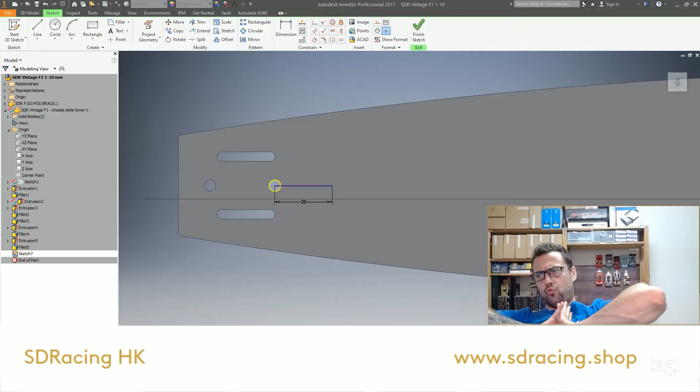Okay, alright, I am back with my chassis design. What have I done? I've just basically extruded the shape of the chassis, let me show you. I've changed it a little bit at the back over there.

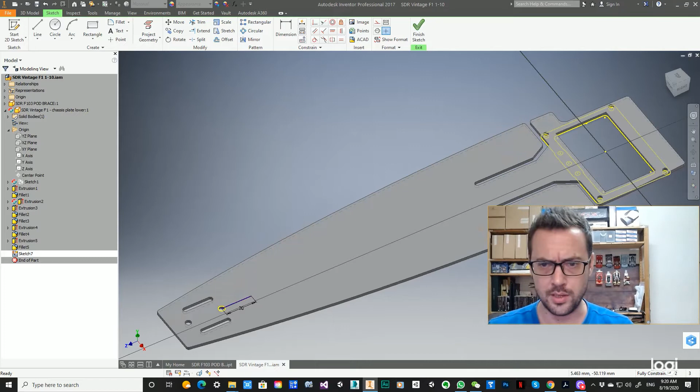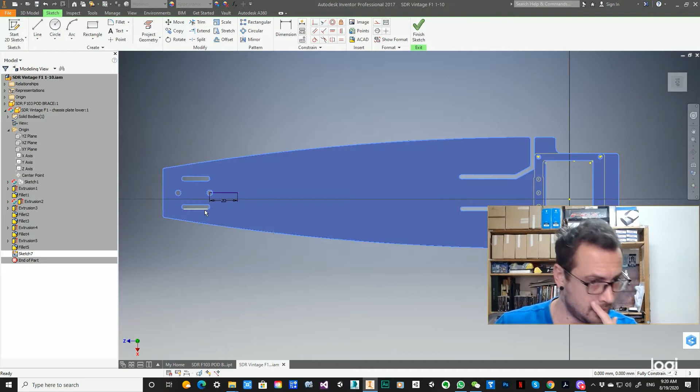I just wanted the pod to be as wide as the rest of the chassis. You can see I have now the curve following all the way to the back from the front, and here I need the opening for the gear, the spur gear from the diff. In the front, all I've added was these little slots where the front ends will fit and stop moving from left to right.

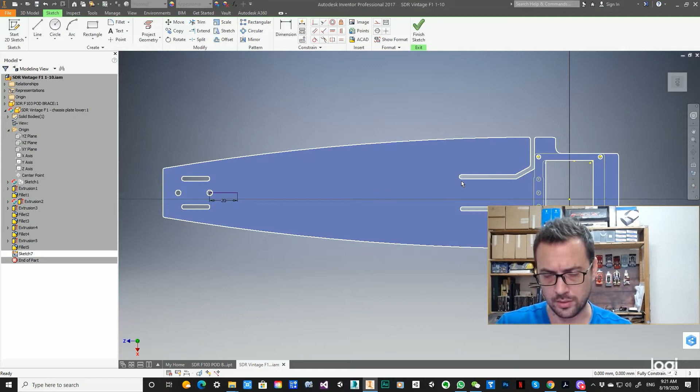The other thing I've changed here, these slots, the relief cuts, were 30 mil originally, and just looking at the overall length of the chassis, I've made it 40 mil, so there would be a lot more flex over there.

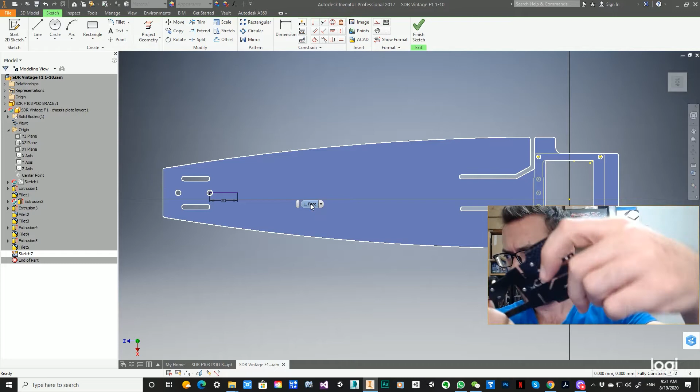And then inside I'm going to do flex cuts as well, the same way I've done on the trike, the mini version. You can see the mini version, I have the flex cut for the T-plates over there, and then more relief cuts, so that allows a lot more flex overall on the chassis.

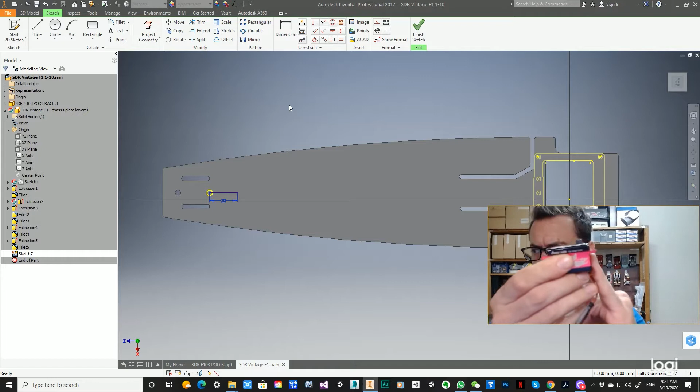So once I have everything placed around battery, servo, and so on, I will work on that. For the front, you can see this little 20 mil marker I've had. This is where the front wall of the servo will be. So I'm going to have to figure out servo mounts over there.

I don't know if I'll make the servo mount along with the front brace or not, because I would rather have one piece that I can use for both the F1 and the vintage F1. So I'll see about that, but I'm just going to place the servo - by the way, your best friend on earth, digital caliper. So the servo is 41 by 20 mil.

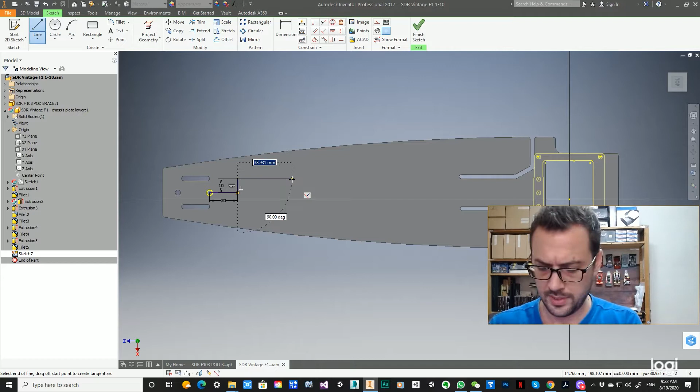So let's go place it. And here you go. So this is where the servo is going to be. And now I need to figure out, first of all, before I think about how I'm going to place the battery.

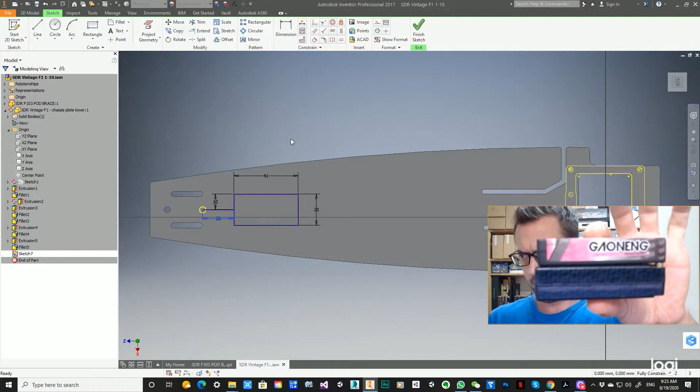Ideally, I would like to be able to use regular hard sticks, shorty sticks, as well as low center of gravity shorty sticks. Those are the same dimensions, except that the LCG is just a little bit thinner. So ideally I want to run those cars with the LCG, but I don't know if the long battery is going to fit on it in length.

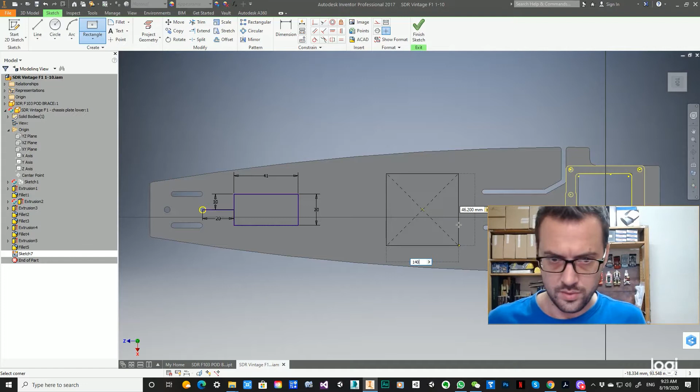But I would like - best case scenario would be to have everything fit. For the long battery, I need 140 by 45. Let's see exactly how wide this is. 46.2 - okay, 46.2, 140. Let's make one of those square anywhere. So we get 46.2 and 140, we can place a long battery pack.

Now the issue that's going to be with a long battery pack is that we're going to have to put the electronics on an upper level. But there is a lot of space in the chassis, and there's going to be an upper plate anyway.

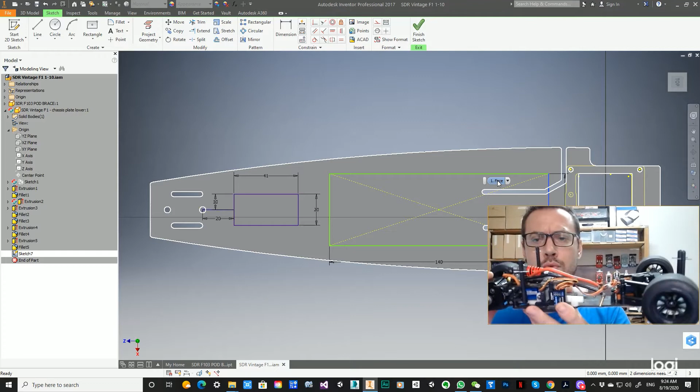The question is, how do I want to remove the battery pack from the car? Let me show you - on cars like the TRF 102, you have the upper carbon deck, and the battery slides underneath. You need to remove 2 screws every time you want to remove the battery. This on its own I find troublesome, but it's only 2 screws.

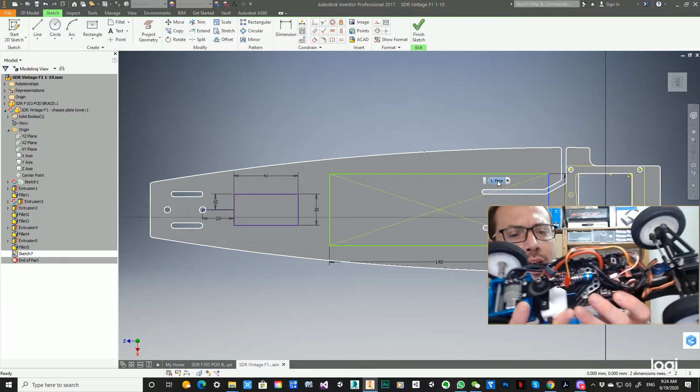On the conversion that I've done for the F103 GT, I need to remove 1, 2, 3, 4 screws to remove the battery and then slide it underneath. This is too much. So ideally, I would like to have something that I can remove from the side, a slot or something. I gotta figure it out.

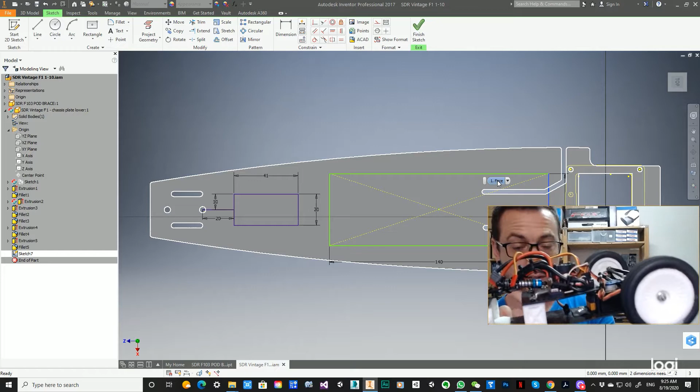Oh, one thing I need to design - you see, the battery here is mounted on this tray, but this tray's function is to hold the T-plates over there. So the battery is about 5 mil from the T-plates.

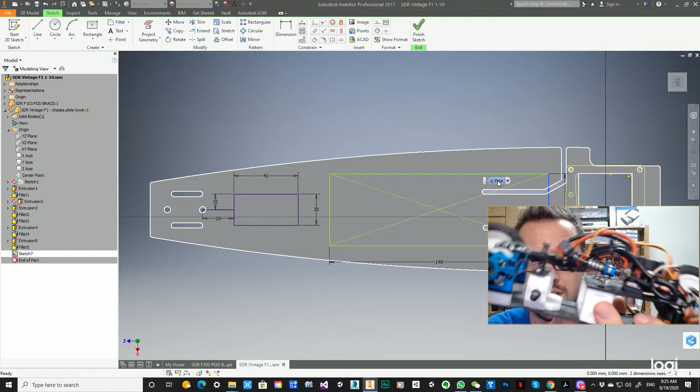Now, with the system that I'm going for, when the T-plate is part of the chassis, I need to allow movement of the T-plate that will not push the battery around. And for traction, I want to have the battery as far back as possible.

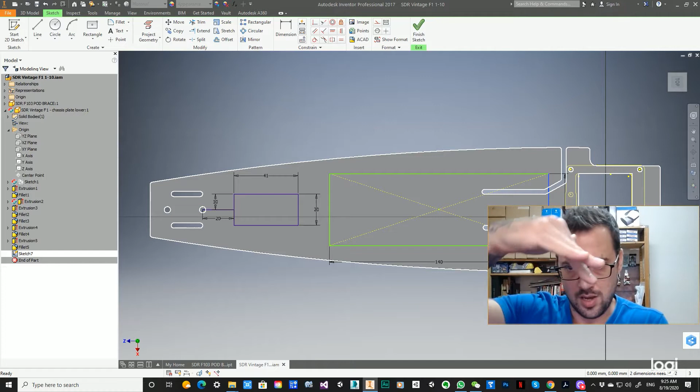So at the back of the chassis here, all this is going to flex left to right and up and down. So I need to give room for that to move. I'm going to have to build some kind of part to hold this at heights.

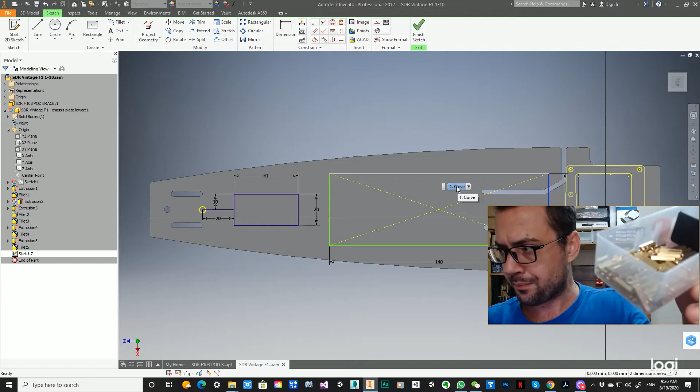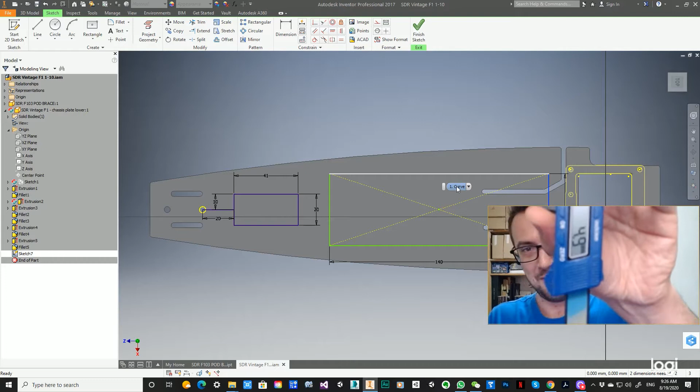Now I have a lot of different poles, different sizes that I'm going to use for the construction. So I think I'm going to have a first deck that is going to be... so this is 4.8, so I guess this is supposed to be 5. Am I at 0? Yeah. Okay, so that's what happens when you buy manufactured 5mm poles, they're 4.9 or 4.8. Let's see if they're all random like that. Yeah, okay, so those are 4.8, 4.5. I could use nylons, I have nylon ones. Those ones are brass, I think the brass are going to be fine.

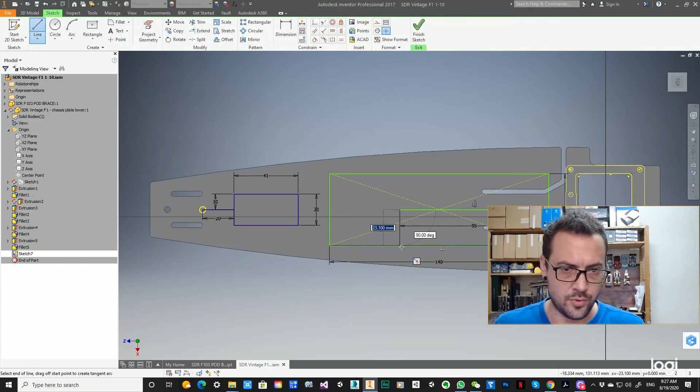So I think I'm going to work out a deck on which I'm going to put the battery on top. Let's see what's the dimension for the shorty. The shorties are 95, same for the LCG, 92. So okay, let's say 95, just to have an average. About this distance from the back, that seems about fine. Okay, so the shorty is going to stop around here. That's my shorty pack and my LCG pack.

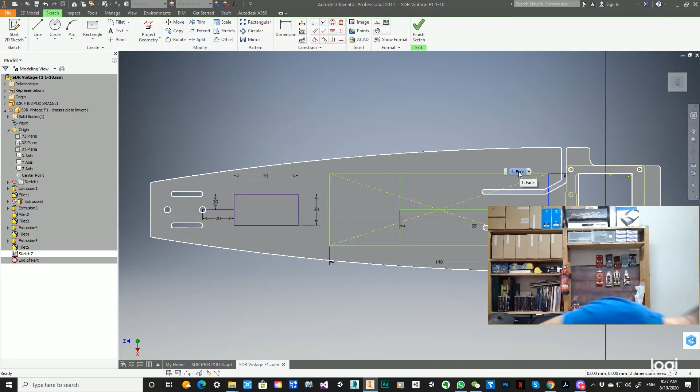So ideally, with the shorty and the LCG, this is where you're going to place your electronics, your receiver and your ESC. You actually even have space to put them on the side here, all the way up. I mean, on the side - you see this is where I placed mine, over here. I placed mine at the back. Traditionally, people will put it in the front to have more weight at the back, which means more traction, but that is just suited for my own taste.

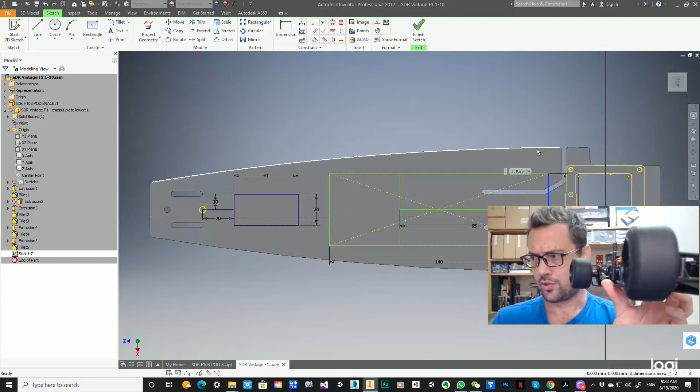But the receiver, can you see? Yeah, the receiver is mounted like that on the side. So on this narrow area, you actually have enough space to place a receiver or an ESC, just place them up. So I think I don't need anything specific for using the long battery, as the receiver will have space on the sides. And all I need to think about is to have a deck to hold those - but actually that might be a really good way to have the battery held simply by a couple of straps.

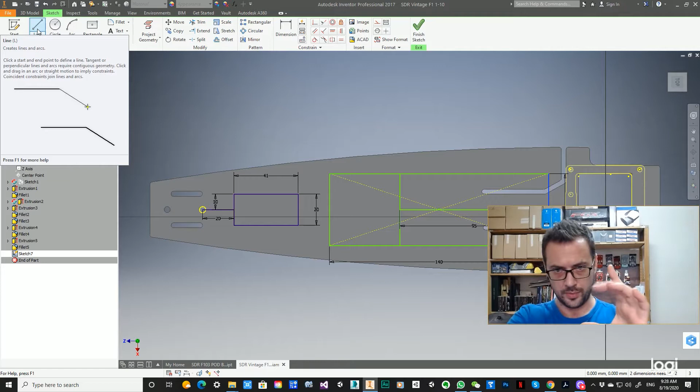Okay, so let's work on that. I think I have an idea what I'm going to do. So we are going to have those poles, those are diameter 4.5, so let's say 5 to be safe. And I think I can design a frame that can hold everything into place, so the battery can be put on from the top and held with a strap around. This way I don't need to actually figure out an upper deck. So that might be the best solution, because then all my dampening can be done with taller tubes.

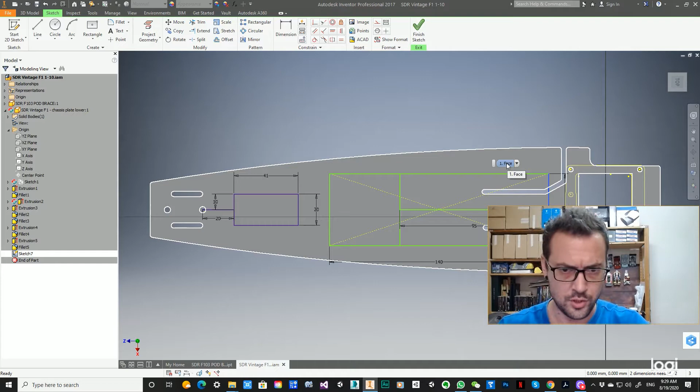So if you try to see - let me show you a quick drawing so you can see what I'm talking about, so it's less abstract. Okay, let's open Photoshop. Let's plug the Wacom tablet, and let's give you a quick look at what's going on in my head. All right, so I'm using my Wacom A4 tablet now to draw. You're going to see my double screen, so I'm going to reduce this to a single screen.

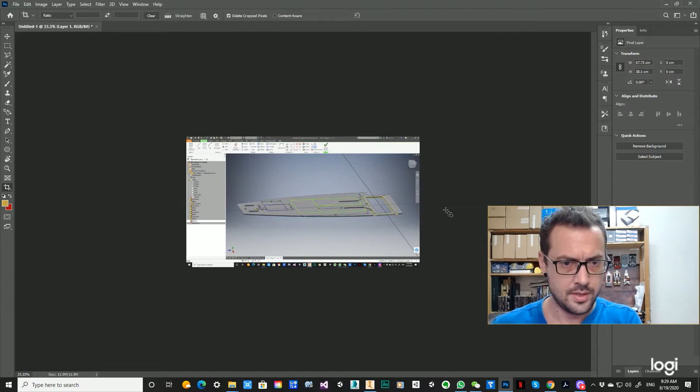So what I'm talking about is I have those little poles, how big am I right now? Okay, first of all, let's change the color. So I have the first little poles that are just 5mm tall, those are going to be over here. Little pole, 5mm. So I'm probably going to have somewhere in the neighborhood of 3 on each side - over there, another one over there, and another one over there.

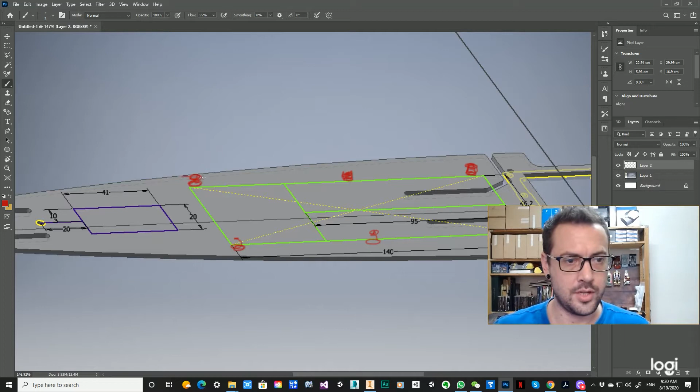And so those are going to accommodate some kind of plate that is going to have probably anchor points for the different size batteries. So I'm going to have to figure out maybe one way will have the full size battery like that to hold the long batteries, and then the other side will have the hook for the shorty batteries, so it will be reversible - you can use it one way for the regular size stick, the other way for the shorty size stick, and you can actually reverse.

If I make it symmetrical, you could reverse it to move the battery from the back to the front. So that FRP is 2 mm thick. This pole here is 5 mm. Then we're going to have these FRP parts that are going to be 2 mm on top of it. And then on top of that, I can have longer poles from any dimensions.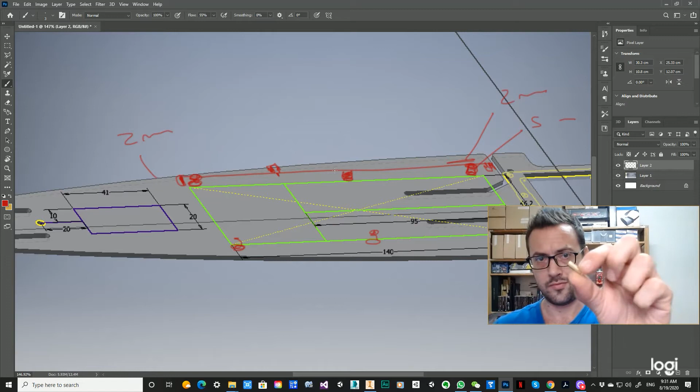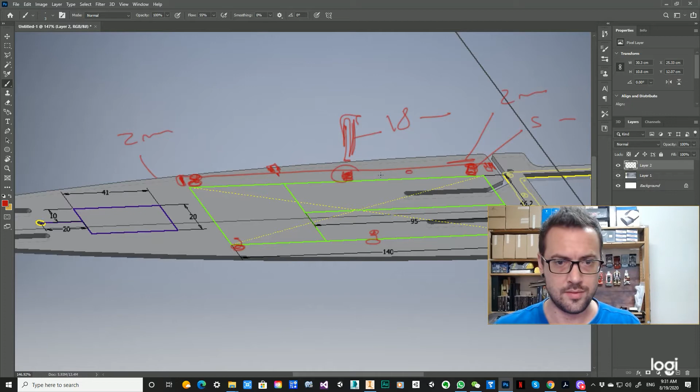This should be 20 or 15. That's an 18. I think I have a couple longer, I'm not sure, but this is easy to source. Yeah, 18 I think is the general size that I have. So on top of that, you can have an 18 mm pole, which doesn't have to be together here. You can have separate holes to mount it in different places, because I'm going to need to figure out at the rear here, we're going to have the pod assembly over there.

And on top of that, we're going to have the plates that you see in yellow right now. And on here, we're going to mount the 2 dampers over there. So this dimension is going to be fixed with the dampers that I'm going to use.

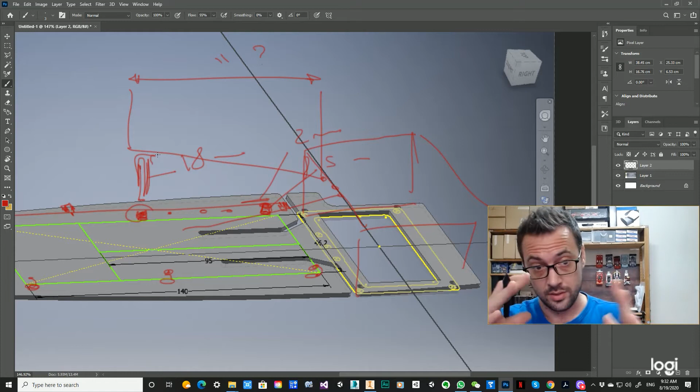So this, I'm going to have to figure out the dimension, and I'm going to have to work out where the 18 mm pole is going to be. And it might be 18, it might be more or less. I think that would be good as well, because the angle that you give the damper changes the dampening dynamic. So this is what I'm going to have to work on first.

I'm going to have to figure out this first mounting holes, trying to have something regular, and figure out this long FRP bar. And I believe that I can have this FRP here, I would have another similar one over here, like so. And then in order to mount the servo, I can have something similar using maybe the 10 mil pole or something like that.

And then I can have an FRP part, so that I can see my mouse. I can have an FRP part that holds this into place around that. And the servo comes to screw inside here. So that would give me options as well to have maybe more stiffening later on, but that would be 1, 2, 3, 4 FRP plates for the entire 5 with the back over there.

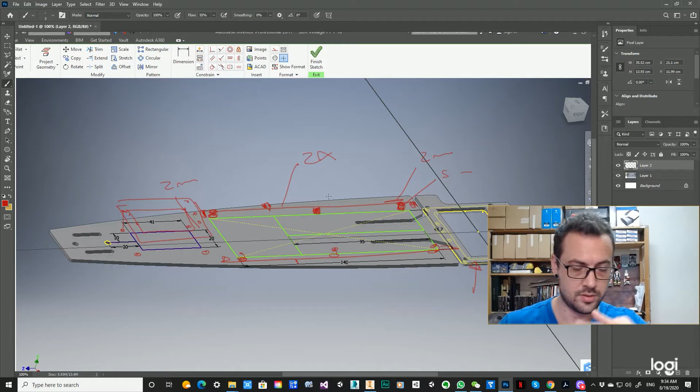So 5 FRP plates, knowing that those are twice the same. They just mirror of each other, but they should be the same if I design it properly. So this would be good, because I can get away with 5-piece FRP only for the entire chassis, and then everything else is brass or aluminum poles.

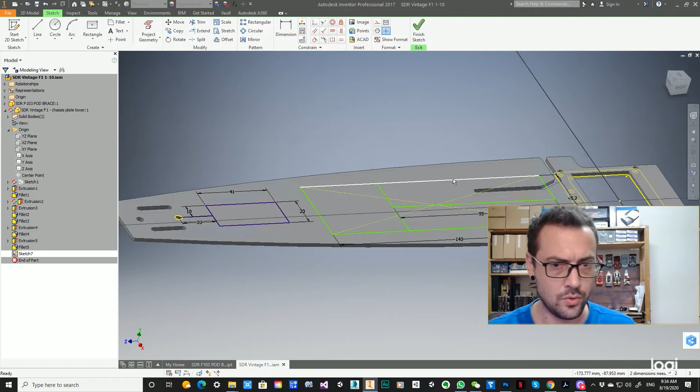Okay, so I got my game plan. I'm happy with that. So now I got to figure out how do I do these bars. Let's see. I'm going to keep this sketch of the batteries as is, because this is a good reference to work from, and the servo is on it as well, so that's perfect.

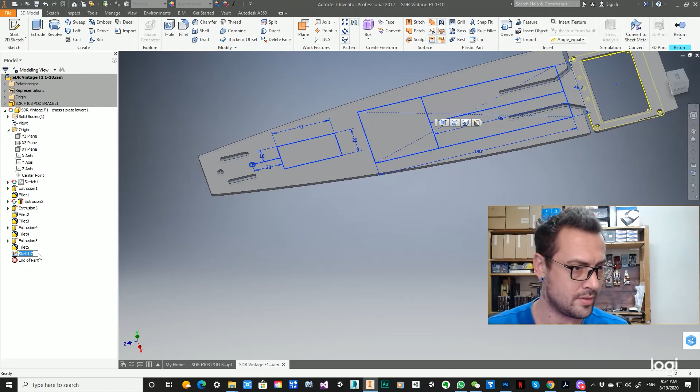So I'm going to keep these for reference, and I'm going to make a new sketch on top of that, and this is going to be placing the FRP that I want to have. So let's sketch the large battery first. How big do we need this to be?

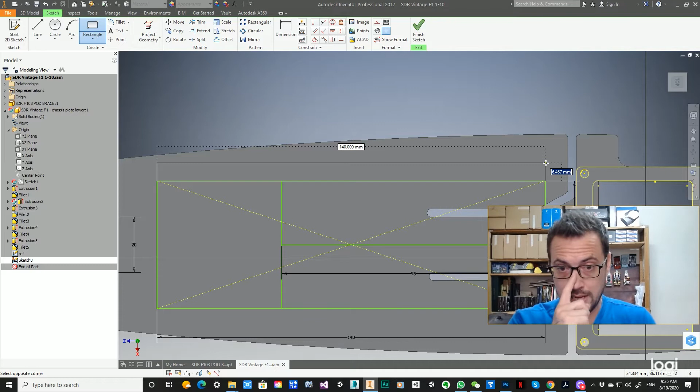6. I want stiffness, so that's another thing that I can do as well, is depending on how many poles I'm going to put along the chassis, I can add or remove stiffness by the amount of mounting points that I have. So I think I'm going to do as many different mounting points as possible. So I want something that's quite thick. I don't want something too thin. So 8 mil should be pretty sweet.

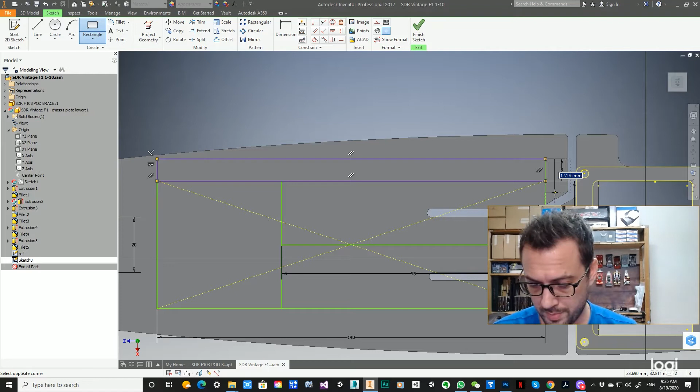On that front to hold the battery, I don't need too much. 3 should be enough, 3 mil should be plenty enough to hold the battery in place. So 13 by 3. And then for the shorty pack, it's going to stop over there. So here is what I was talking about. I'm going to give it 3 by 3 as well, and this is going to be what holds the shorty pack in place.

And so this shape that I just drew over there is something that is going to be usable in both directions. Let me remove everything so you just see this on its own.

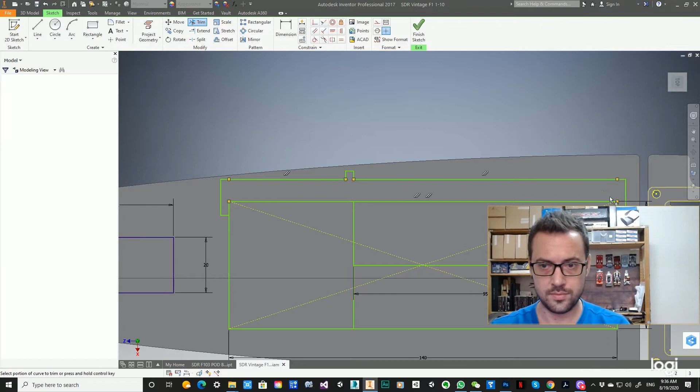We can remove this one. So...

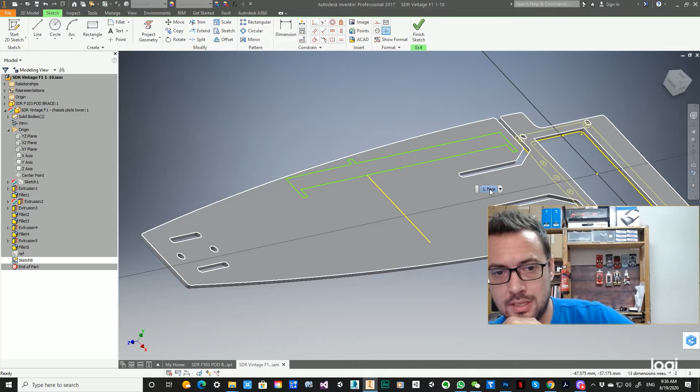That will be the FRP plates on top, and I can have probably in the neighborhood of 8 holes equally distant over there, and then I can mount as many or as little mounts as I want to make the chassis more or less stiff. I think this is a very good tuning option for the chassis. Yeah, so let's do that.

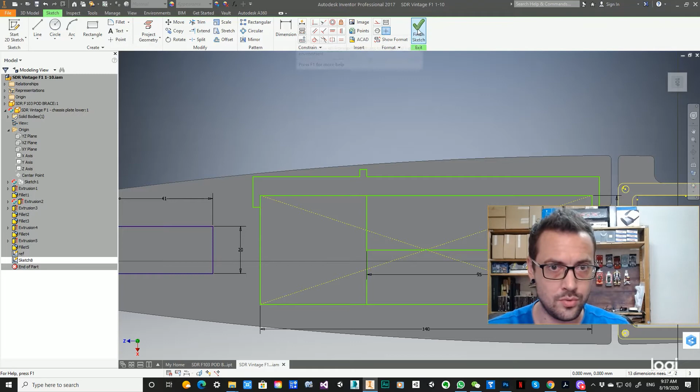Let's bring back the battery. This is just for reference what I'm doing. The FRP will be a new part of the assembly of my 3D file. At the moment I'm keeping this as a reference point, so I'm going to do, once again, keeping this as the FRP reference. So this is going to be my ref.

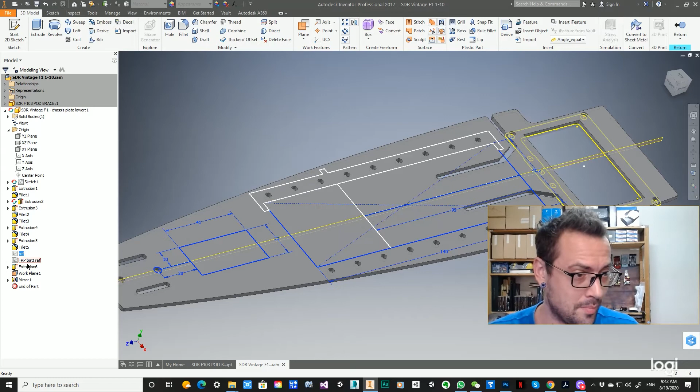So let's bring back the drawing that I had before. I had done the FRP reference plates that will be holding the different battery sizes, and so I made mounting holes equidistant, both in width and in length, with the battery mounts. The reason why I decided to do that many is that I can select how many to use when I mount my battery, and this way you can stiffen or loosen the flex of the chassis by how many you mount between the lower plates and the upper plates. So this is a really big plus, I think.

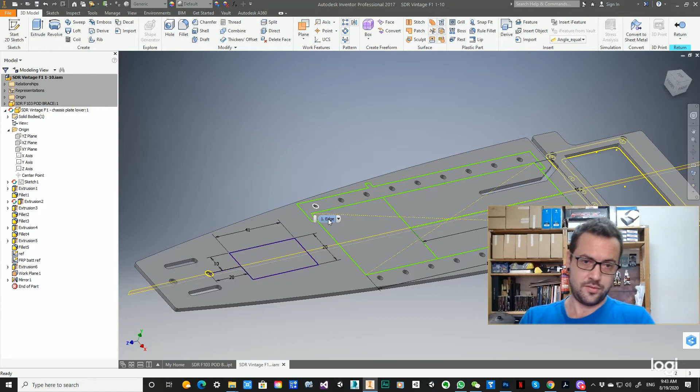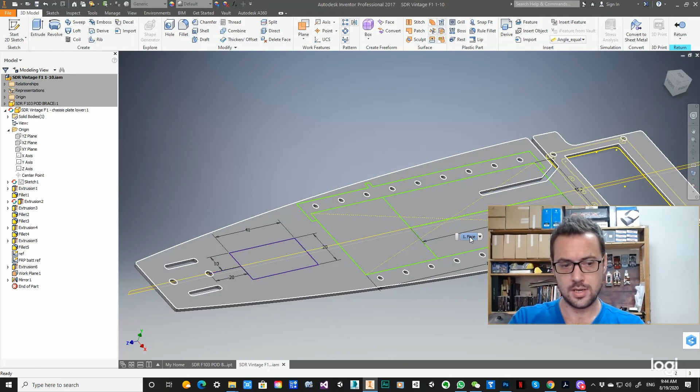I don't think I'm going to use 5 mil. Oh no, I am going to. I just realized a big mistake I made that I didn't think about. My original intention was to raise the battery 5 mil in order to give the plate over here, the T plate, enough room to bend up and down and left and right. Right now I'm designing those plates as if they were going to be stuck directly on the chassis, but they are not going to be. I need the battery to be raised a little bit. In order to do that, I just need anything underneath that is going to raise it and allow for a Velcro strap or elastic strap or tape to be put around.

So this is where I'm going to use those 5 mil. I need something that is going to be balanced and that is going to mount underneath here. So time for a new sketch.

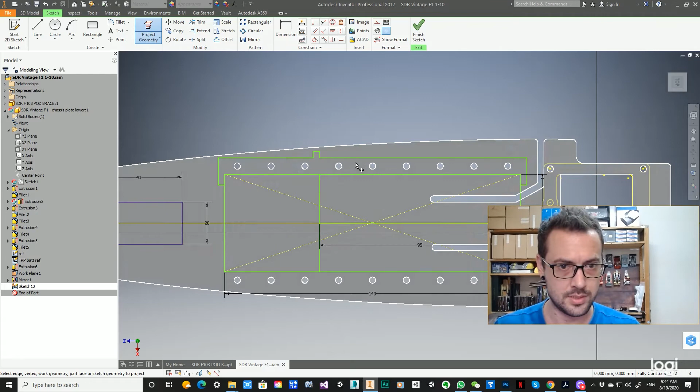So I want to mount the battery. I'm going to have a plate down there that is not disturbing the flex of the chassis too much. Actually, I can do what I did on top here and have more options to mount these plates. The thing that's going to be tough if I do height adjusters like that...

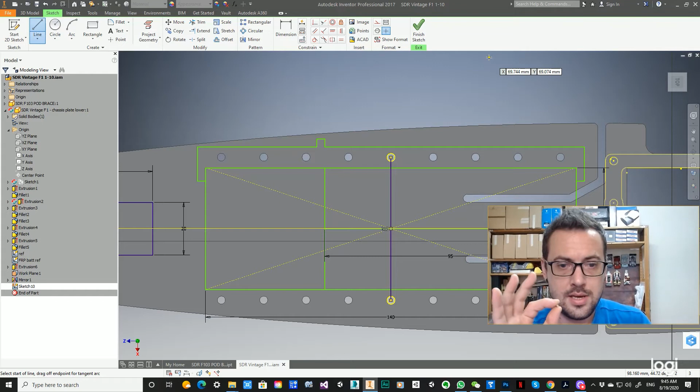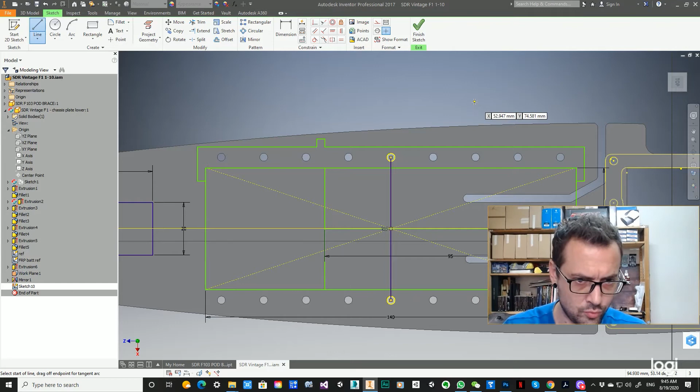You see they're very, very small, just 5 mil, which means between the lower screw and the upper screw I'm going to have a very small window to mount them. But I think if I find the right size screws, that is going to be feasible. I'm just going to have to work it out. I think the screws are going to have to be very, very short.

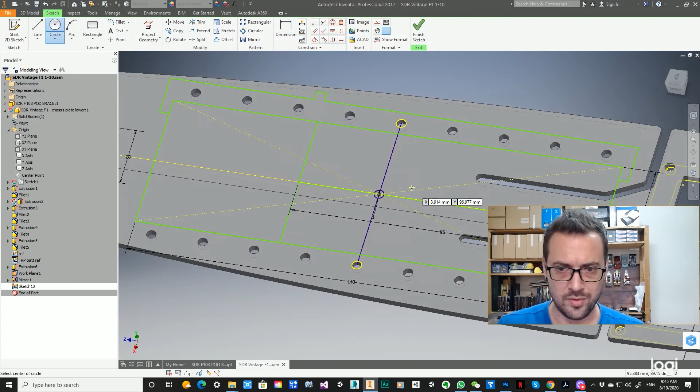But I think that's not a problem, so we're going to mount it from the bottom. I think this is the best way. I want to have parts that are as small as possible because I want to be able to make as many of everything in one big sheet of FRP from the factory. So that's another thing I'm considering, that everything is going to have to be countersunk.

For the chassis to be completely flat at the bottom. Yeah, it is. Sometimes I'm thinking I shouldn't countersink, just for lowering the cost, but I think this is just nuts.

I'm not going to be able to get away without doing the countersink. So for my screws, I'm going to have to make the mount. I think this is fair enough if I do something between those holes.

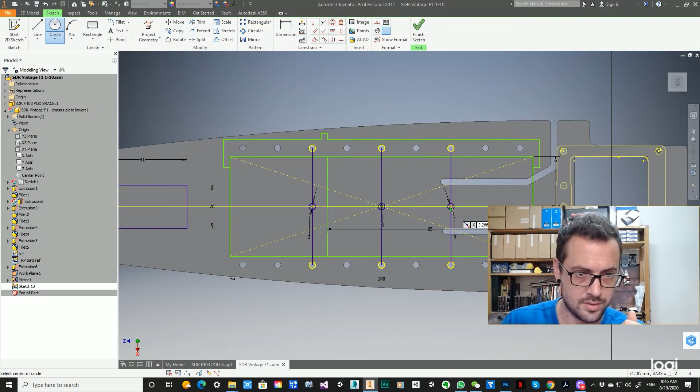I think this is the center of everything, so it should be good enough to do it here. I'm going to first place the holes in the chassis, then make a reference drawing of the shape I want on top of that. That will be another FRP part. Oops, there's a big shape over there. Okay, is it recording? Good.

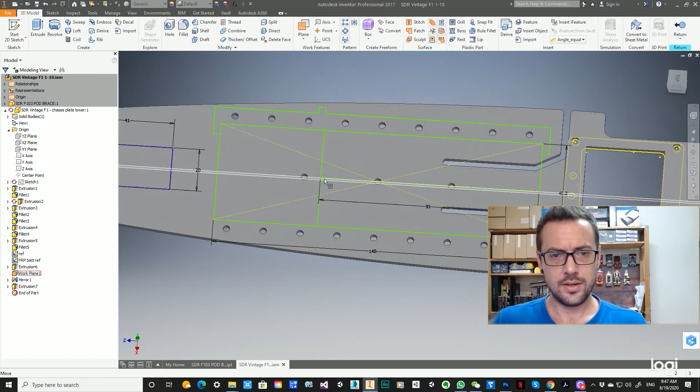All right, so holes are cut. Oh, that's the battery that's giving me this big square over there. Okay, that's fine, so the FRP plate isn't going to need much, actually.

It can be pretty hollow. I don't want it to be too structural. I don't want it to affect the chassis flex too much. So I think it's good if you can mount it freely.

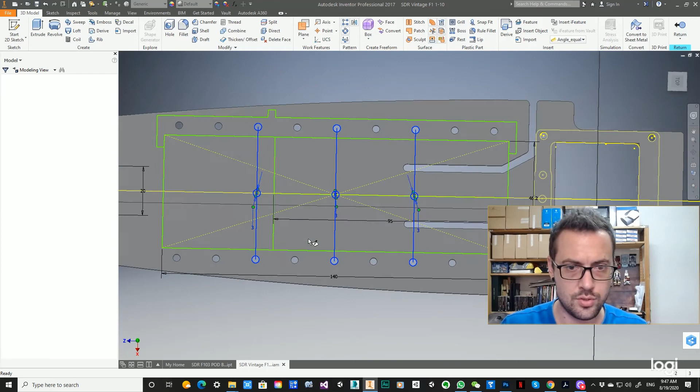Actually, this one is not placed properly at all. This is right in the middle of my flex plate. No, that's not going to work. I need to change where this is. This one is not going to be here. I'm going to have to remove, 10 mil should be good. Let's move this guy 10 mil inside.

And yeah, it doesn't need to be symmetrical in any way, shape, or form.

Another thing is, I know I don't need a strap around because I have those little hooks. Okay, so that's good. So this is just going to be a strap going around. Do I have an example?

Not really yet at the moment. Well, it would be something similar to that, in the sense that you have those little shapes hooking the battery, and then you have the strap going around here. So it's similar to what I have here, except this is 90 degrees from what I'm drawing at the moment on the screen.

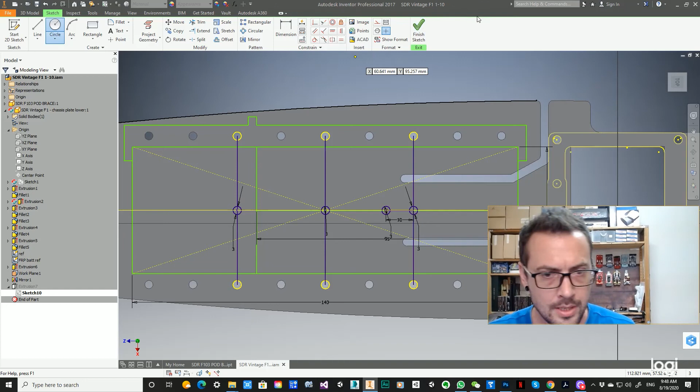Okay, so I'm going to switch my hole to this one, and I'll be good to go. Whatever happened to my voice here, do not be worried, it's perfectly natural. Okay, so those are my holes where the plate is going to mount, and I'm just going to do a reference drawing of the plate so I can work it out on my next sketch.

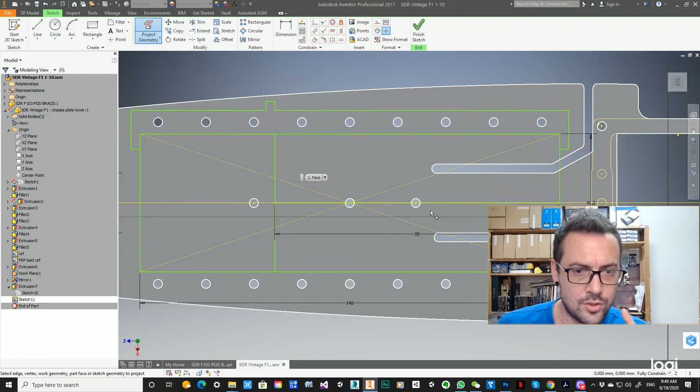Okay, so I don't want to disturb the flex plate at the back at all. The size here is good to have all these options. Thinking in the center here, I don't really need them. I don't need to have too many over there.

So let's just make something that's large enough to hold the battery. If we have anything in the neighborhood of 28, even 26, in width, we should be good.

And then for the length, it doesn't really matter, because as long as I have as much of the battery covered as possible, I'm good to go, since this isn't going to touch the plate over there. So maybe I can be pretty aggressive, maybe something like 82. That should be pretty good.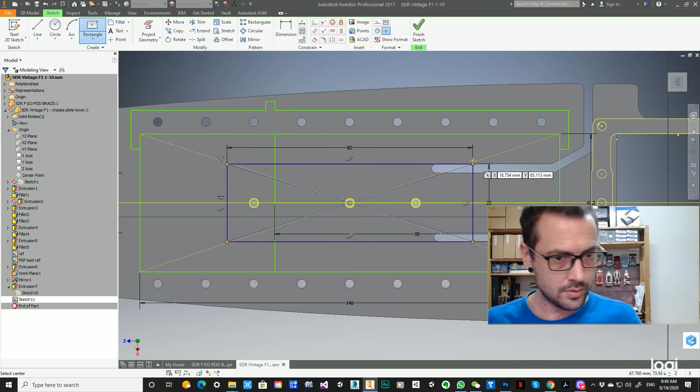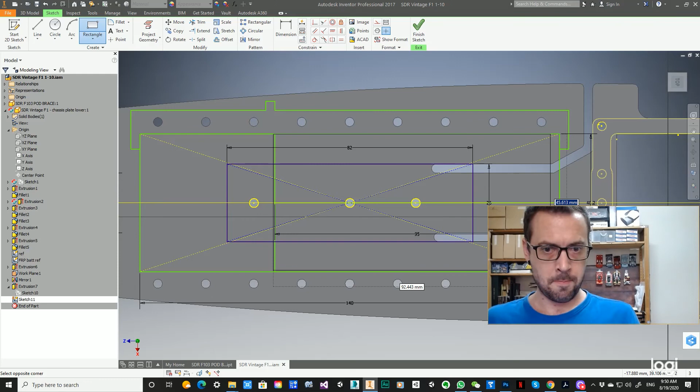And this way, the shorty battery pack that would be over there is going to have plenty enough space to hold it from here to the back. So I think this is the way to go. Yeah, okay, let's go with this.

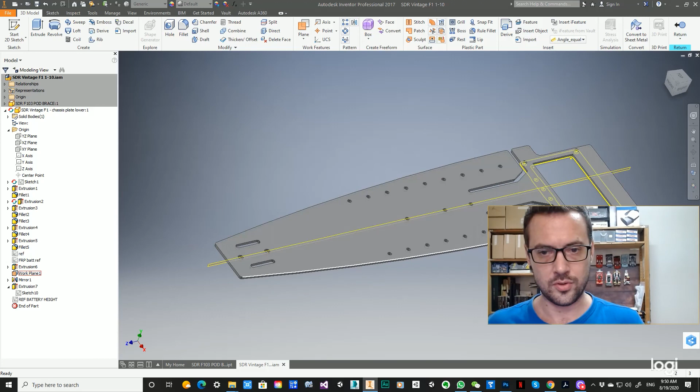So that's going to be my reference for the battery height adjustments. Okay, so here you go. Let me remove all those reference drawings, and we're going to stick to what we have now for the second part. Oh, this is another part altogether.

Okay, let's get rid of it. Okay, so this is the chassis as I have it now. I'm still missing the holes for the servo mount in the front, and there should be a little

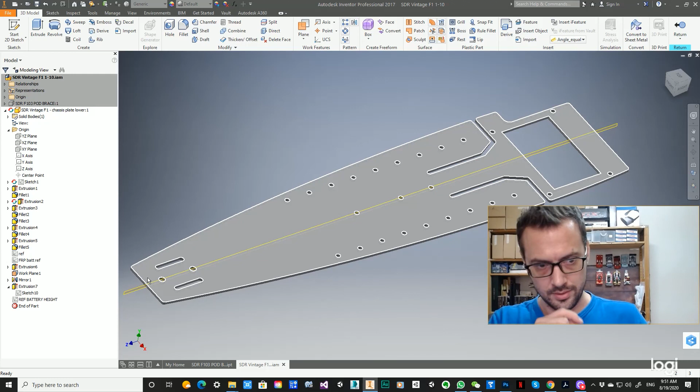bar sticking out here just to be able to snap the front of the traditional F1 front spoilers or bumpers. As you can see over there, this little marker sticking out. So this is something I'm going to have to do as well.

Other than that, I'm just missing the countersinking holes, just countersink everything. And at the rear here, I'm going to have to figure out probably 2 to 3 mounting holes for doing whatever I want to do at the back, be it diffuser, spoiler mount, or whatnot.

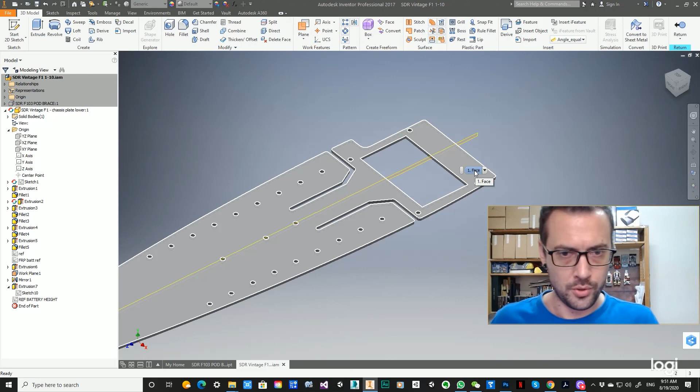So, okay, we are pretty much done with the chassis design. Next time I'll come back with this one completely finished, and then I'll start working on the other levels, the other